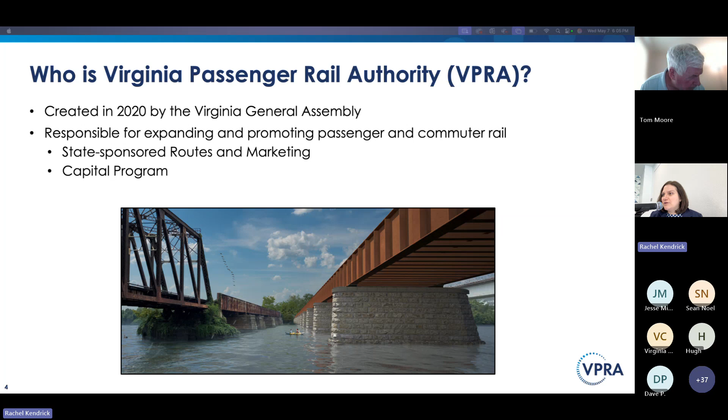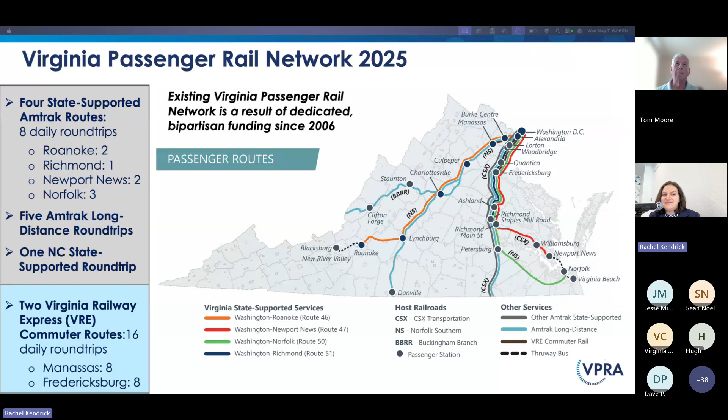I'm going to go into that right now. So this shows you the Virginia Passenger Rail Network. We have 4 state-supported Amtrak routes with 8 daily round trips, 5 Amtrak long-distance round trips, 1 North Carolina state-supported round trip, and for VRE, 32 trains a day, 16 in Manassas and 16 in Fredericksburg.

So what you see here is a map of all of our projects. We have many projects between Washington, D.C. and Richmond. What we're looking to do is separate passenger rail from freight rail so we can run more passenger trains. We are looking at capacity, and as the population grows and people come for more jobs, we want more ways for people to get to where they're going, to work, to entertainment, without having to drive.

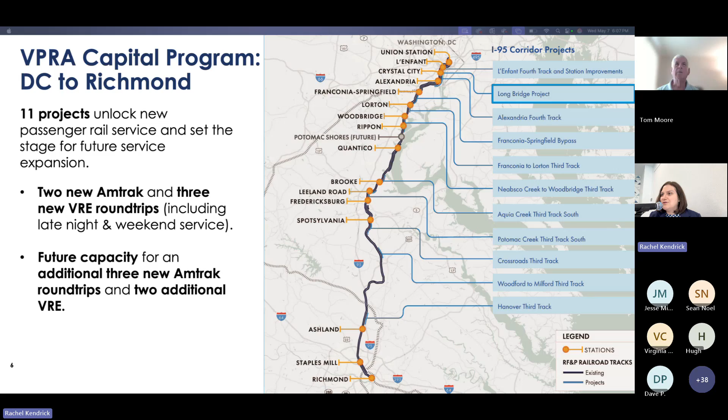The new service we're unlocking includes new Amtrak and VRE round trips, including late night and weekend service on VRE that's not currently available, and then future capacity for 3 new Amtrak round trips and 2 additional VRE trips. So you can see many projects here, but the one we're here to talk about today is the Long Bridge Project. This is the Long Bridge Project area, starting, from left to right, in Arlington by the Long Bridge Aquatic Center.

It then goes and crosses over the GW Parkway and the Mount Vernon Trail, over the Potomac River, over East Potomac Park, over I-395, over the Washington Channel, over Main Avenue, through the Maryland Avenue overbuild, and then ends at LE Interlocking. An interlocking is just a railroad term where a bunch of tracks converge that allow trains to move from one side to the other.

But LE Interlocking is just south of L'Enfant Station. So while we call it the Long Bridge, it's actually a series of bridges, the largest being the bridge across the Potomac River. The existing Long Bridge right now is 2 tracks. The new bridge we're building across the Potomac River will also be 2 tracks, and the existing bridge will remain in place, continuing to be owned by CSX, while Virginia will own the other 2 tracks. That allows us to really separate freight from passenger.

Why is that so important? Right now, everything that comes up the East Coast pretty much has to go across this bridge, and this bridge is shared by VRE, Amtrak, and CSX. So all the freight and shipping, all the VRE trains and all the Amtrak trains essentially travel over this 2-track bridge. South of here, there are 3 tracks in Alexandria. North at Union Station, going up the northeast, are 4 tracks. So this 2-track bridge really does become a pinch point where everything converges.

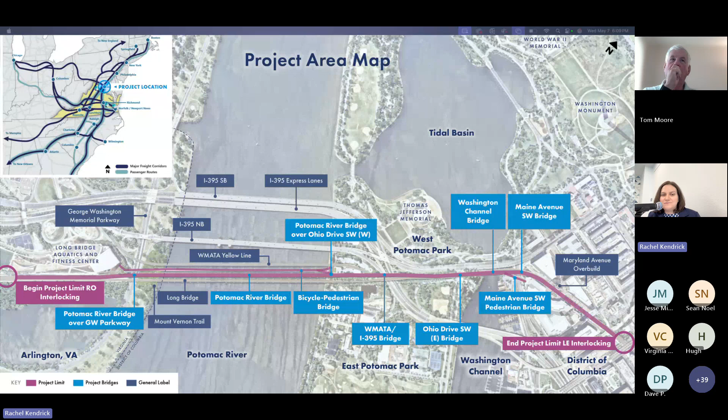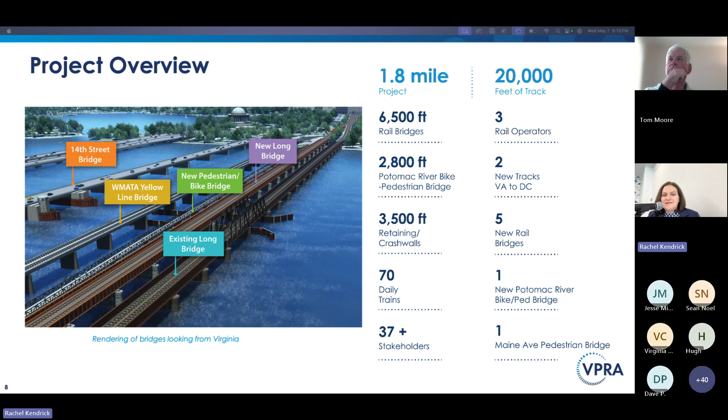So this is just another visual of the project. It shows you that we're working in a very constrained space. From left to right, you've got the 14th Street Highway Bridge, the WMATA Yellow Line Bridge. Then we are fitting our 2 new bridges in between the existing WMATA Yellow Line Bridge and the existing Long Bridge—the bike pedestrian bridge and the new Long Bridge. So you can see there's a lot of structures in a pretty small space here. On the right-hand side are just some facts about the project.

So this slide is showing you how we're going to construct the project. Because of the size, it's being split into 2 packages for the purposes of construction, while it remains one project. There's a south package and a north package. Tonight we're here to talk about the north package, but the south package is responsible for everything across the Potomac River, starting in Arlington—both the bike pedestrian bridge and the new 2-track rail bridge that go over the George Washington Memorial Parkway and Mount Vernon Trail and over the Potomac River.

The south package ends at the abutment in East Potomac Park by Ohio Drive that is closest to the water. The north package then picks up there and continues the project, essentially everything that is in the district—all of the infrastructure through East Potomac Park, over the Washington Channel, over Main Avenue, and through the Maryland Avenue overbuild to LE Interlocking.

The North package is a progressive design build contract, and that design builder came online a little over a year and a half ago. We are entering early works construction packages—when I say early works construction, we're not building any of this infrastructure yet, but we're doing some work that will help lay the groundwork for that future construction. That's starting really right now and continuing through early next year.

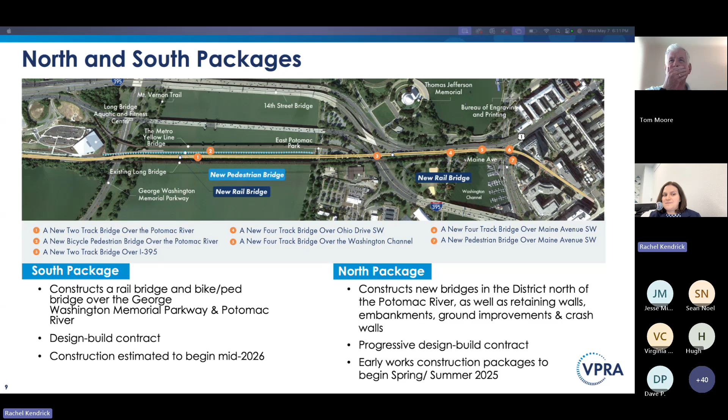The South package's design builder came on board in January of this year, and construction is estimated to start in the middle of summer next year.

This is a project schedule update to show you where we've been and where we are now. This project has been coming for a long time, so hopefully many of you have heard of it before, but if this is your first time, welcome, it probably won't be your last.

We started this project in 2011. It was led by the District Department of Transportation, DDOT, with grants from the Federal Railroad Administration, FRA. Through those studies and a lot of public involvement, we got to the options where we are now: a new 2-track rail bridge, the existing bridge staying in place, and a new bicycle pedestrian bridge. That's essentially what we looked at in 2011.

We completed our environmental analysis, known in shorthand as NEPA, the National Environmental Policy Act, in the fall of 2020. At that time, when the document was signed by the Federal Railroad Administration and NPS, it was transferred over to VPRA to finish the design and construct it.

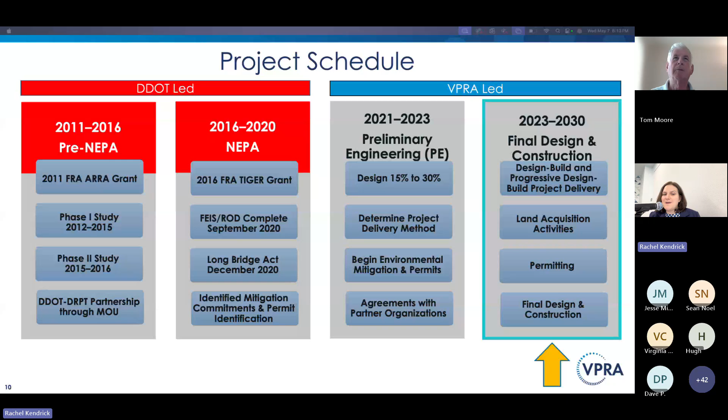So we are in that final box from 2023 to 2030, where we are acquiring land, obtaining permits, finalizing design, and then beginning construction. This just shows you that there are a lot of cooks in this proverbial kitchen.

This project adds a lot of value for the district. The estimated value is $300 million. Obviously, one of the biggest added values is the new bicycle pedestrian bridge over the Potomac River. Additionally, some of the existing bridges have poor vertical and horizontal clearance, and wouldn't meet today's standards. We're improving some of those heights and clearances, which means better movement for trucks or large vehicles passing through the district and less chance of bridge strikes.

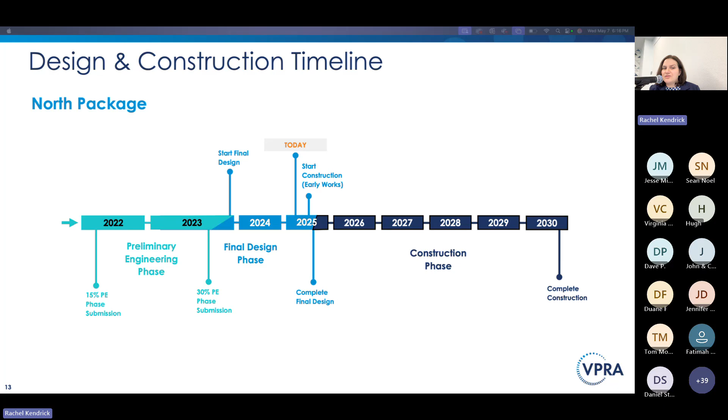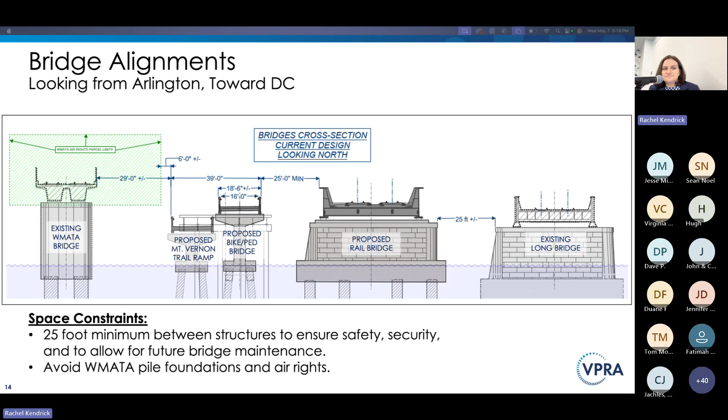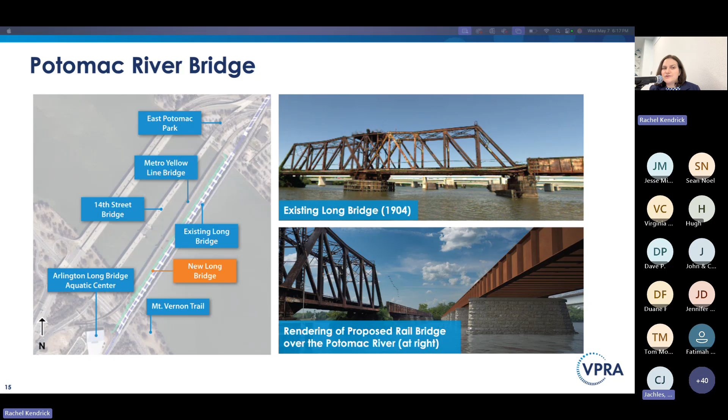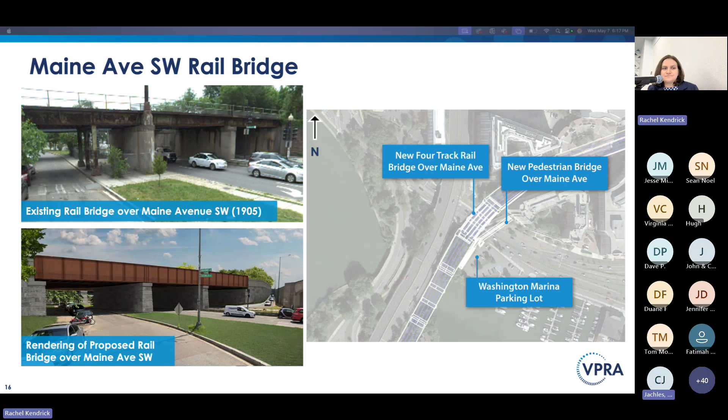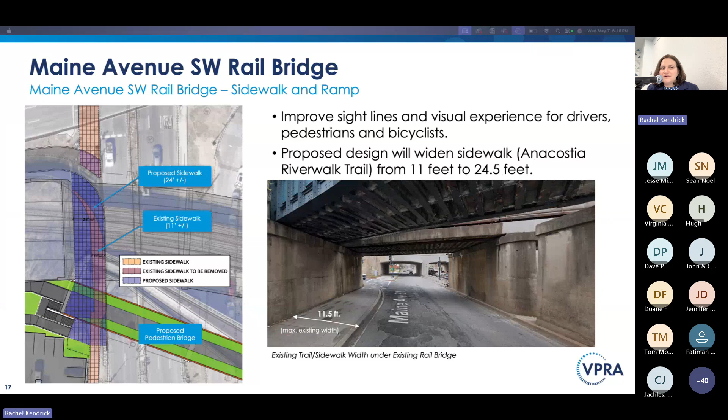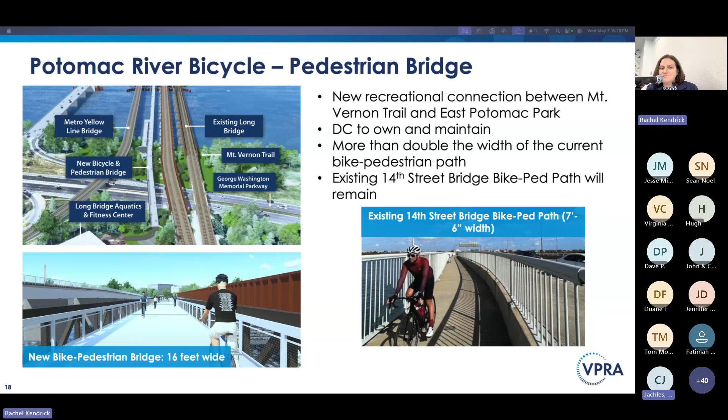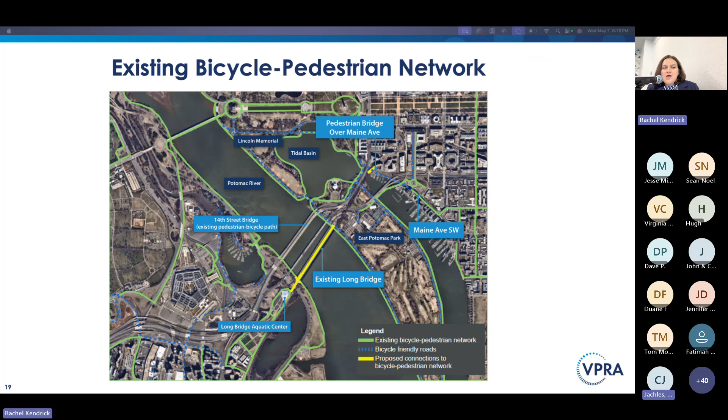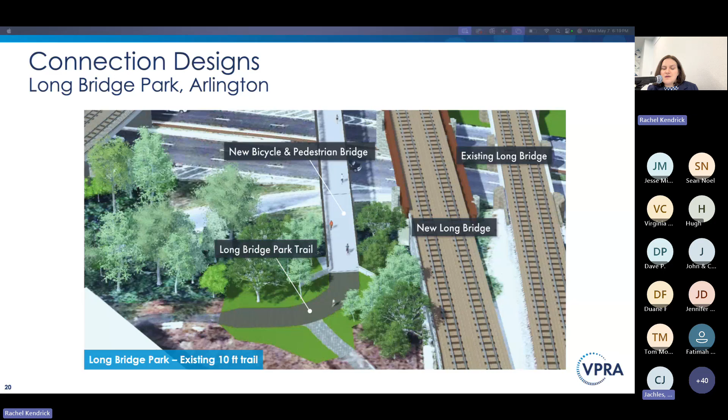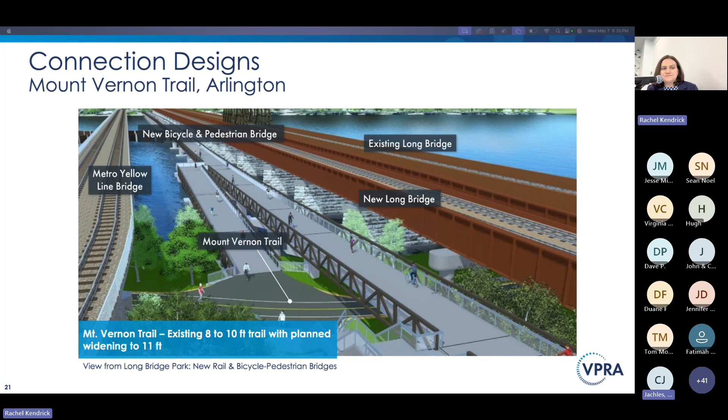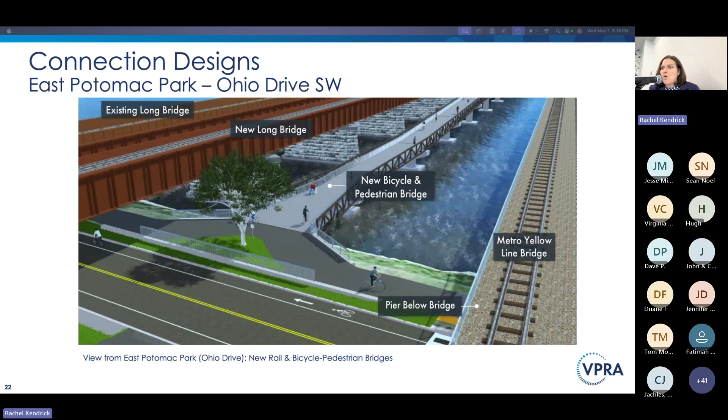Sorry about that. So this is going to connect into the bike lanes on Ohio Drive. For anybody who saw some of the original designs of this bike ped bridge, one of the original designs had switchback ramps on either side. We had gotten feedback from the bicycle community that they did not feel that was user friendly, so you can see that these landings tie directly in without making people essentially go back and forth. We got really positive feedback from cyclists and walkers on this change.

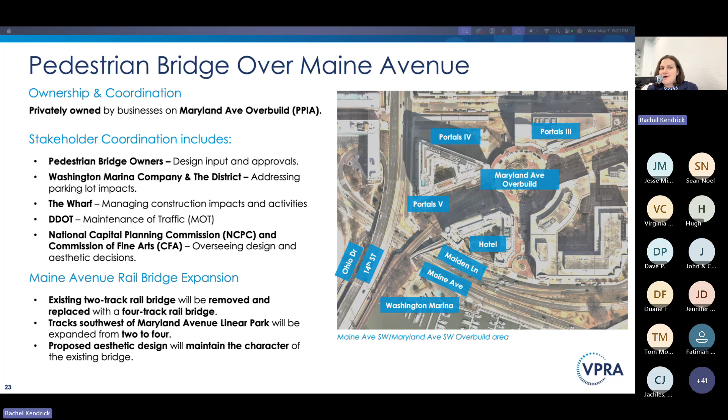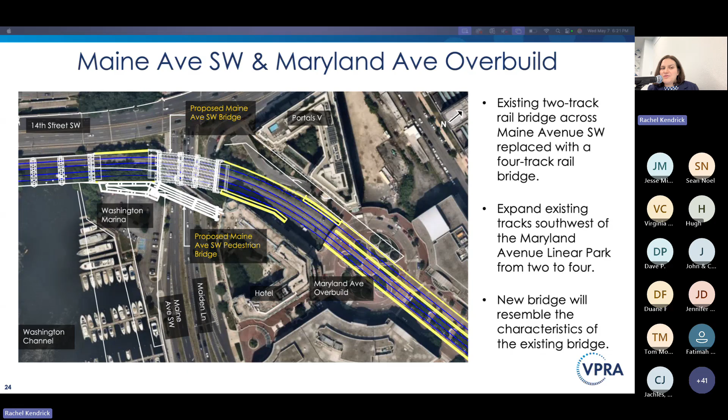Unfortunately, that bridge lies exactly where the two new tracks need to be put for the rail structure, so it has to be taken down and rebuilt. Here you can see the design of the new 4-track rail bridge, and right next to it is where we are going to put the replacement Maine Avenue pedestrian bridge.

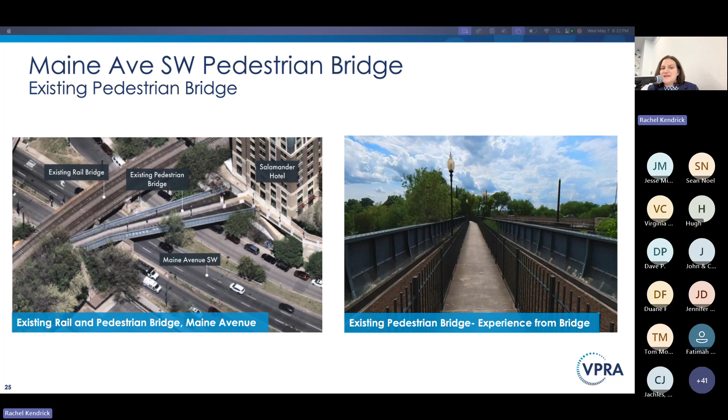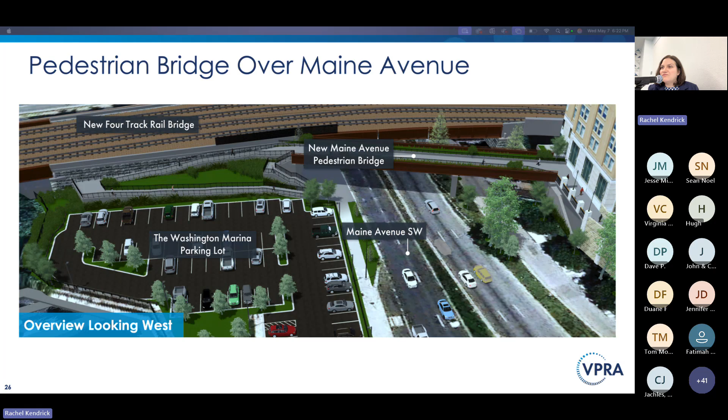On the left, you'll see the existing pedestrian bridge. You can see how it comes right up to the 2 rail tracks, which is why it cannot remain in place when we construct the project. Then there's a view from the existing bridge. This is a rendering of the new Maine Avenue pedestrian bridge. The current bridge only has stairs, so it is not accessible. This new bridge will have both a ramp and stairs, and we've coordinated this design very closely with the owners of the bridge over many years.

In order to put in this new bridge, it does require us to take a small sliver of land from the Washington Marina parking lot. However, we will be reconfiguring that parking lot to make use of the space so that they have the same number of parking spaces that they have today.

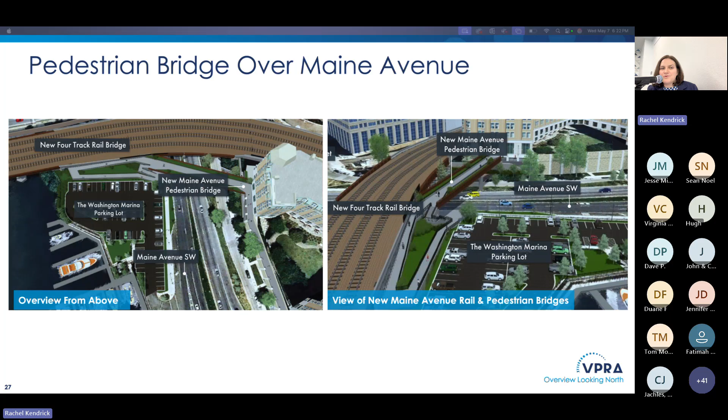These are just more renderings from different angles of the new 4-track rail bridge and then the replacement bridge over Maine Avenue. This shows you a cross-section of what it will look like. It's going to have planter beds on either side, which is what it has today, and it will be wider than the existing bridge.

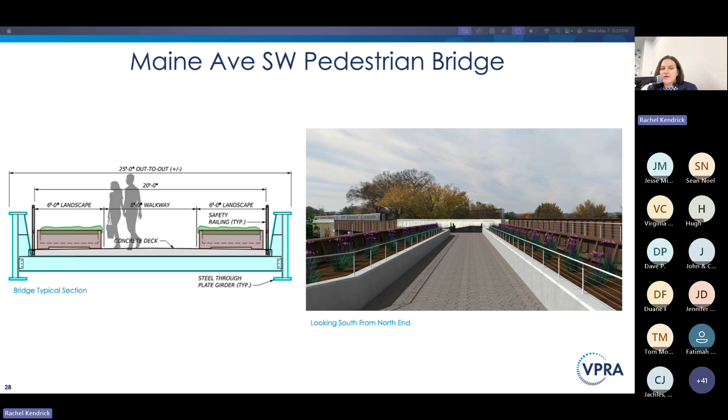So what's happening now? We have some pre-construction activities. I alluded to that through the early works packages. We're doing some archaeological testing, vibration monitoring, borings, test piles. Essentially we're doing some ground penetrating activities that allow us to inform the design for construction to understand how the bridge needs to be built in order to be structurally sound. We're doing some early clearing of trees and brush, and we're working on our maintenance of traffic plan, which is coordinated very closely with DDOT.

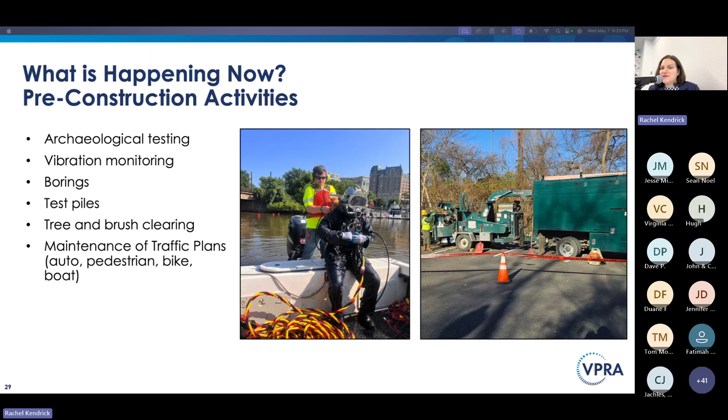Additionally, we have regular stakeholder coordination that is ongoing. We meet monthly and sometimes weekly with these stakeholders: CSX, VRE, Amtrak, DDOT, the National Park Service, and the adjacent property owners. These are all stakeholders that we meet with regularly, and then of course we meet with other stakeholders on specific issues or when there is the need for that.

A lot of the topics that we discuss on a regular basis with regular standing meetings with these stakeholders are traffic analysis, travel, noise and vibration, the structures themselves and the design of them, utilities, inspection and permit, special event, and public outreach.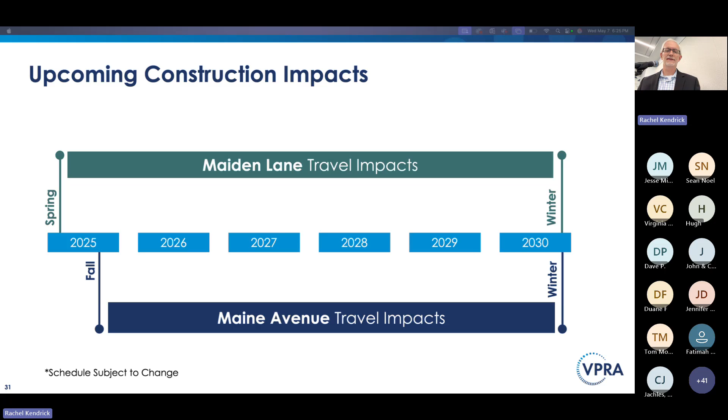We wanted to hone in now on the specific impacts to Maiden Lane and Maine Avenue. In a nutshell, what this graphic conveys is that there will be continued and sustained impacts on both these roadways from later this year through 2030. Let me share some additional details and of course the mitigation steps that we're taking to minimize impacts.

So first, Maiden Lane. There will need to be a closure of Maiden Lane here that is shown in orange, and I'm trying to use my mouse here to show that area there kind of at the bottom of the screen. That area of Maiden Lane will need to be closed for construction of what Naomi just mentioned.

Could you maybe clarify where Maiden Lane is? Sure.

Just for perspective, on the left side of the screen is the 14th Street US 1 roadway. Maine Avenue is in the bottom left corner of this screen right here. This is the Maryland overbuild, where the Portals buildings are.

So Maiden Lane actually diverges off of westbound Maine Avenue and currently services the Portals 5 building, their loading dock, as well as their garage entrance. It's currently a one-way operation going northbound up towards D Street.

During construction, this portion of Maiden Lane in orange will be closed. The portion of Maiden Lane north of that will be converted to a two-way operation shown in this graphic. Access will still be maintained to the 1331 garage entrance as well as the loading dock, but it will be maintained only from D Street, and two-way traffic will exist along Maiden Lane.

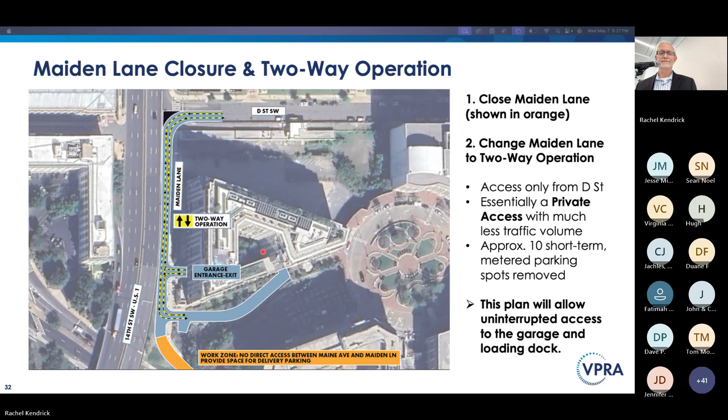Secondly, I wanted to provide an overview of the Maine Avenue construction areas and the schedule. In the upper left graphic here is what we're calling westbound construction. You can see here 14th Street is on the left side of the graphic. Maine Avenue runs from the left side to the right. You can see the diverge of Maiden Lane here, right near the Salamander Hotel, as well as the existing pedestrian bridge over Maine Avenue. So this westbound construction zone is what's shown here in dark green.

This is kind of the northern side of this area. The eastbound construction area is basically the inverse of that. It will be on the southern side of Maine Avenue, shown here by the lighter green or teal color. What we tried to do here schedule-wise was to associate the colors with the approximate time frames of when these phases would be under construction.

So if you look at the dark green zone here in the upper left box, and look down at the schedule, you can see construction will start in this area later in 2025 and run until approximately spring of 2026, where then we will flip and implement the eastbound construction zone. That will be in place, shown in this lighter green color, until early 2028, where then we will convert back to the westbound construction zone, running for approximately a year until 2029. Then we'll convert back to the eastbound construction zone.

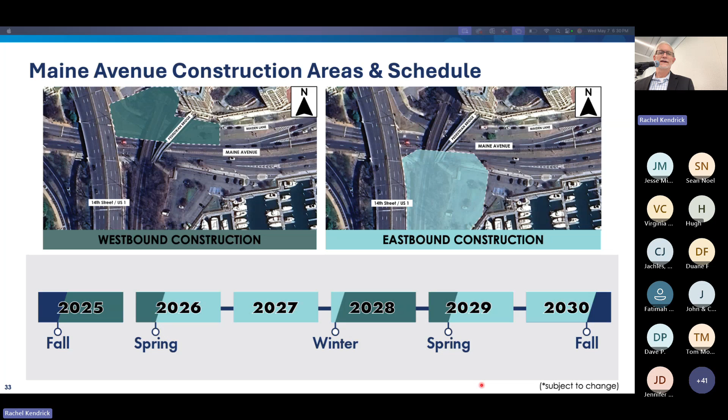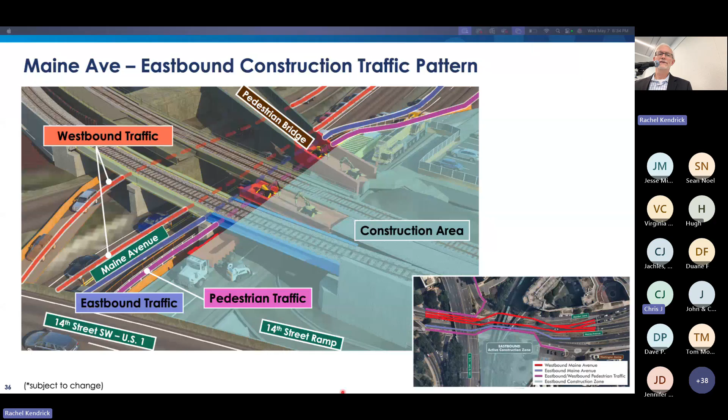Here's more detail on pedestrian and bicycle accessibility. As shown in the upper left graphic, this is for the westbound work zone, again shown in dark green. Pedestrian access will be maintained, as shown by this dotted pink line, along the south side of Maine Avenue, right by the marina parking lot. Pedestrians on the other side of Maine Avenue will be routed around the work area for safety reasons. Looking at the graphic on the right, pedestrians will be directed up to D Street, where they'll follow appropriate detour signs over to 12th Street.

This graphic on the right does show where the approximate sidewalk closed signs would be, but there will still be access to the Salamander Hotel from this area. The graphic in the bottom left shows that continuous pedestrian access along the eastbound lanes of Maine Avenue. So access is still provided, albeit a little more circuitous, for pedestrians on the north side of Maine Avenue.

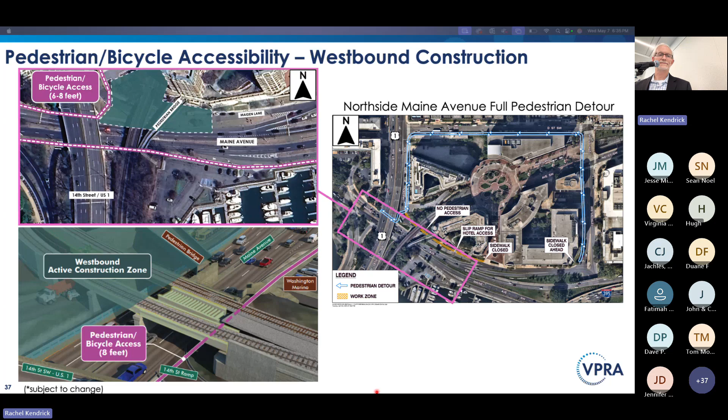For the eastbound construction phase, shown in the light green or teal color, pedestrian and bicycle access will still be maintained along the eastbound travel lanes, routed around construction traffic. Again, for pedestrians on the other side of the roadway, they will be routed up to D Street and over to 12th Street.

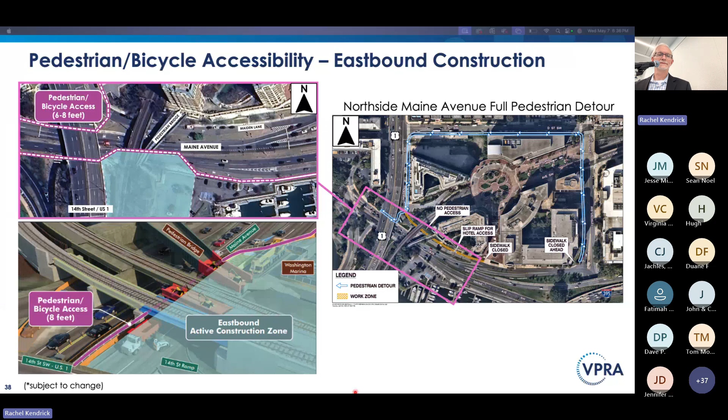Access will always be 8 feet wide at all times. Along this eastbound roadway, the pedestrian and bicycle access will actually double during the cherry blossom season. As mentioned, it's part of the Anacostia Riverwalk Trail, and we're intimately familiar with the increase in bike and pedestrian traffic during that season, so the bike and pedestrian capacity will double during that time.

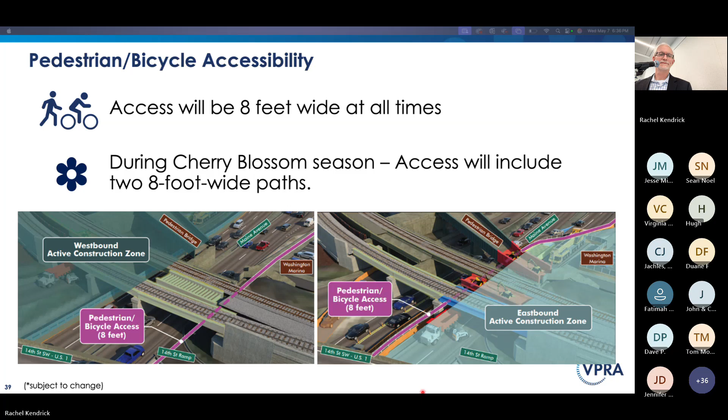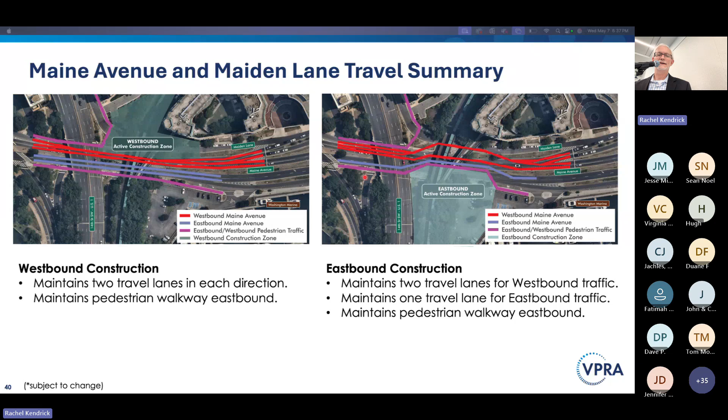The eastbound construction phase, shown here in light green, will maintain 2 lanes westbound, though one of them is relocated to where Maiden Lane is today. There will be 1 lane eastbound on Maine Avenue, and you can see in magenta where pedestrian access is maintained.

There are a number of work zone mitigation measures that go into planning this complex project. It really starts with a comprehensive transportation management plan that looks at all facets of constructing the project, the phasing of how to maintain traffic, bicycle, and pedestrian access. It analyzes the impacts of all those details and develops a streamlined and minimized way to complete the work. The design builder has completed the first version of that plan, and it's a living document that's regularly and routinely updated as conditions change and more information becomes available.

Throughout this whole process, we've been in very close coordination with DDOT. That's one of the entities we have weekly coordination meetings with to talk about various submittals and upcoming efforts, and we'll continue that throughout construction to make sure we're in lockstep with them on signal timing and everything else as we manage this construction project.

They've also developed a traffic incident management plan to streamline responses throughout construction. They'll be monitoring traffic operations and safety, reviewing work zone setups, noting any crashes in the work zone, and monitoring queue lengths and travel times. We'll be in close contact with DDOT to request signal timing changes, and acquiring traffic data throughout construction so we can be proactive in minimizing work zone impacts.

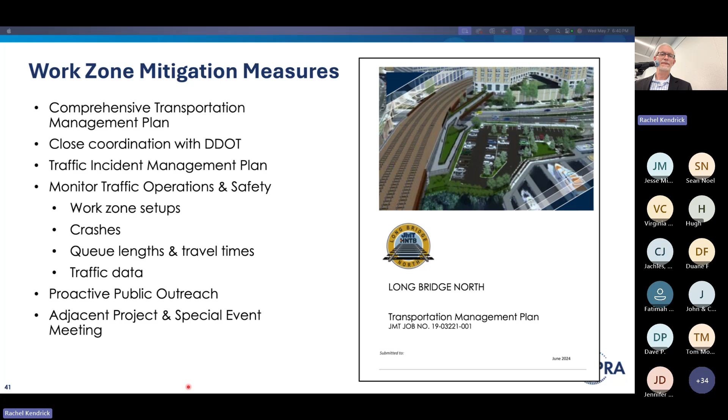I think I'm going to hand it over to Ian to talk about construction mitigation.

All right, good evening again. We recognize and understand construction will cause impacts to the community, and we are committed to mitigating and minimizing those impacts as best we can.

The project will adhere to the district's noise ordinance. One way we'll do that is to monitor noise levels to ensure construction activities remain within those limits. We have some other items we'll use to maintain noise under those ordinances, one of which is using backup alarms that regulate volume based on ambient noise in the environment.

We'll also make every effort to do daytime work, limiting night work where we're able, to avoid noise and other safety concerns. We're going to monitor noise levels throughout construction, and we'll also utilize whisper-quiet generators—getting every piece of equipment as quiet as possible helps.

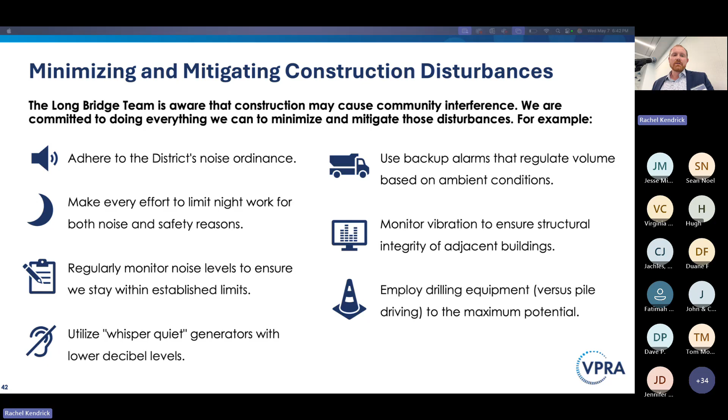All right, next I'll jump into boating impacts. Primarily here this evening to speak about the North Package, but we'll also get into some impacts of South Package along the Potomac River. But first, in the Washington Channel, upcoming work - really we're kind of open for the remainder of this year, nothing planned there. But it is important for us to let you know that the Washington Marina right adjacent to the project area will remain open, as well as a portion of that parking area. So those impacts will follow in later years. The Washington Channel will remain open. It's just we're working at the very end of it towards the tidal basin.

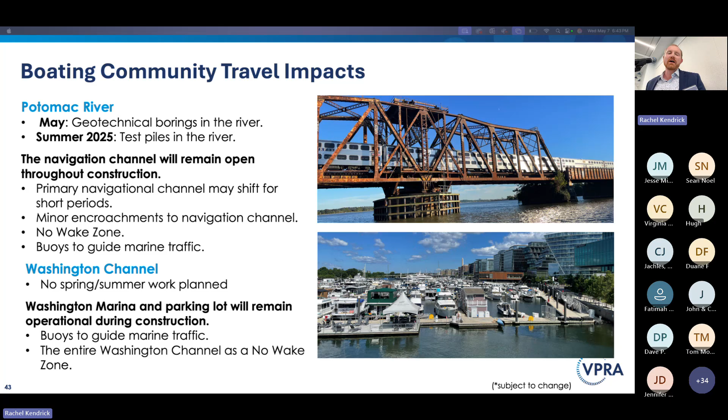In the Potomac River, again, that is part of the South Package. The navigation channel will remain open throughout the course of the project, but also understand that the navigation channel may change to an adjacent channel next to the one that's there currently today. We'll utilize buoys in order to ensure that boaters are able to navigate the work areas, basically cordoning off where we're building. But we'll also utilize no wake zones in both locations. All right, with that, I'll pass it back to Meredith.

Okay, as we wrap up, we just want to make sure that you know how we will be continuing to push out information to the public over the course of this construction project, and how you can continue to communicate and give us feedback throughout the project. We will use our website quite a lot. It's already a robust website. We will announce all of the construction activities that are going on through both written announcements on the website, but also a construction disruptions map, which is an interactive component of our website. So you'll be able to go in and see how your travel might be impacted by activities that are going on related to this project.

We encourage you to sign up for our newsletter. We have a QR code here. You could just scan it right now and sign up for our newsletter, but we will be continuously pushing information out through email updates. Social media is a great way to follow us. We will have portable message signs on site. We'll be issuing traffic advisories through DDOT and National Park Service, and we'll be using press release methods for major events. So we have a lot of different ways that we're sending information out. You can pick the information strategy that's best for you, but I do encourage you to sign up for this email list. That will be a great way to keep up with us.

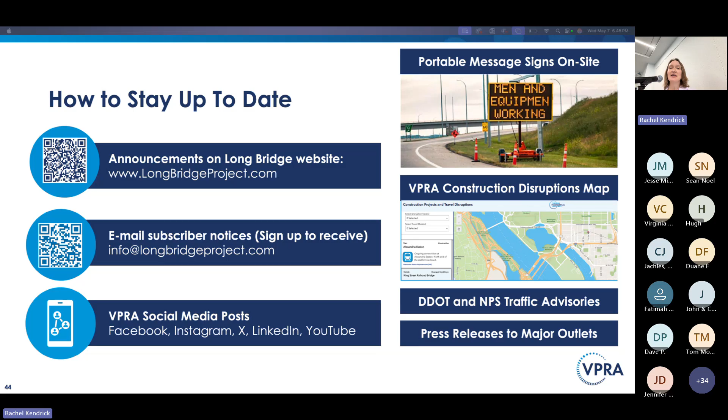And then, of course, we'll continue with our ongoing outreach methods of community meetings, door-to-door outreach. We've established a community advisory group with representatives from residential communities, the business community, advocacy groups, elected officials, and their staffers that we meet with quarterly to make sure that we are sending the latest information out to the public, and then asking those individuals to bring back to us what they're hearing in their communities. So we look forward to keeping in touch with you. Thank you for being here tonight, and now we'll open it up for questions.